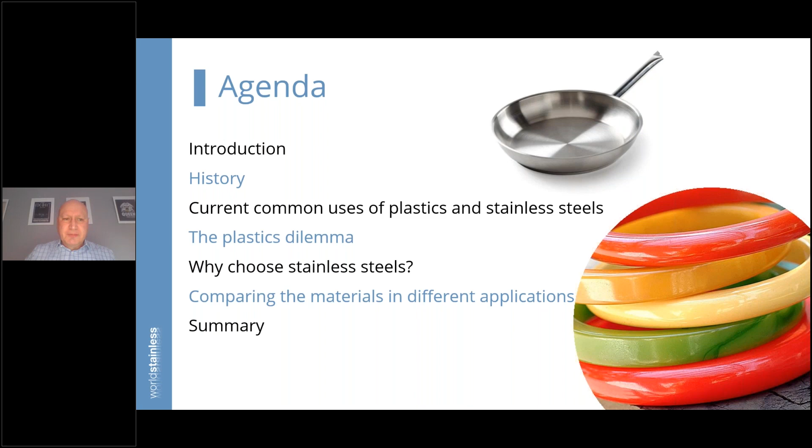So a little bit of an introduction, and I think it's fair to say that both plastics and stainless steels were invented around the same time in the early 1900s. Bakelite, the first fully synthetic plastic, in 1907, and the first commercial stainless steel cast in 1913, so 6 years apart broadly. It should equally be recognized that the notion of synthetic polymers was not brand new at that point. There was something attempted in 1869, however it was not quite 100% synthetic. So I just want to make reference that the development of plastics is quite old in that context.

And it's equally fair to say that both groups of materials have supported some amazing things and have been things of necessity in many cases. Our society has evolved, whether it be computers and cell phones that we all love and hate in equal measure today, to more important things like medical equipment, clothing, and even body armor from a plastics perspective, and stainless. The general healthcare of our society would not have taken some of the leaps forward without the use of stainless in household appliances, surgical instruments, and equipment for safe processing of food and drinks. We rely so heavily on stainless steels in those areas. So a little reflection of some of the really important things in our society.

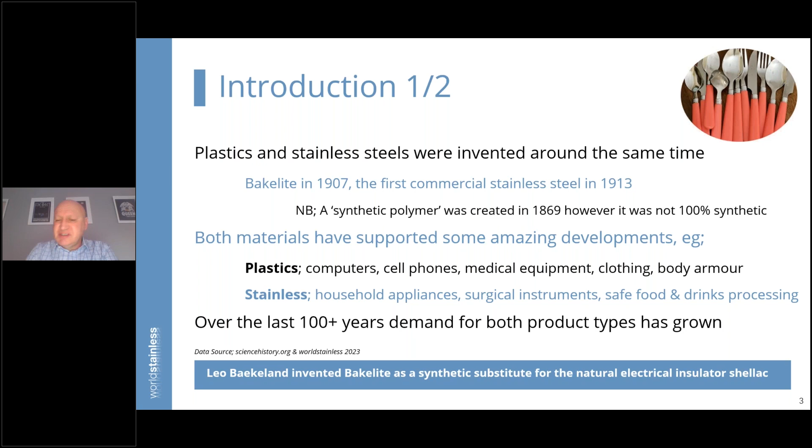And equally, there is no doubt that over the last 100 years or so that these products have been around, the demand has consistently grown. So there's a shared element there too.

But also there's some really interesting differences when you look at the tonnage of material produced. Plastics approach about 400 million tons on an annual basis now, and it's hard to define, but around half of that is reported to be single-use plastics, and that's clearly an area of concern that most people would recognize. By contrast, stainless is much smaller, around 50 million tons or a little over that produced annually. So we're talking, when you consider the relative densities of these products, a huge amount of plastic things and a smaller amount of stainless steel things.

And in many cases, if we think that a lot of plastics are single use, that's a short life compared to stainless steel, because when you correctly specify a stainless steel for an application, it will provide a service life in excess of 100 years. And equally, what's really important and interesting is you'll get that service life with either very low or in some cases, zero maintenance.

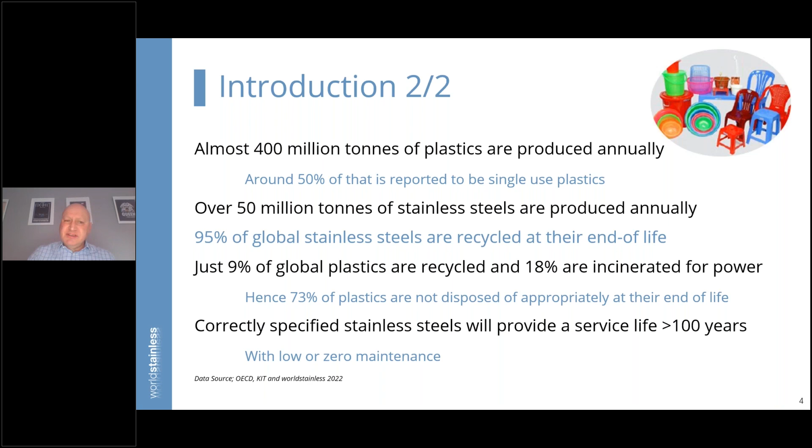So having set the scene, let's start with a little history. I think we have to, depending on where you start in the world, reflect on two important guys, Leo Baekeland and Harry Brearley, who were both recognized as pioneers of their respective industries.

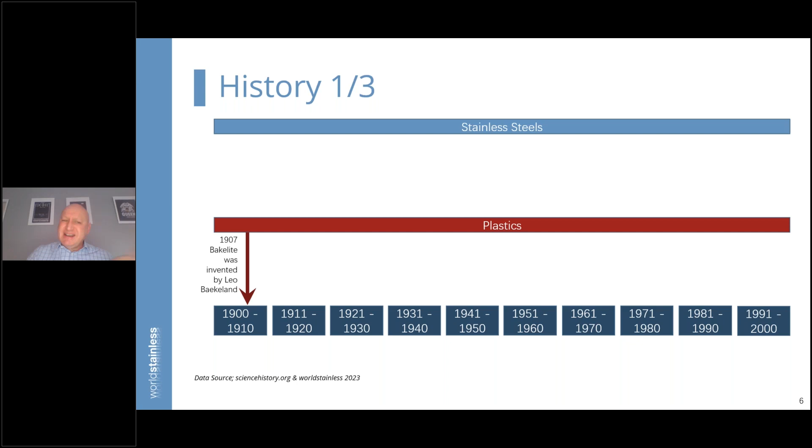If we start with a simple timeline, I'm not going to include everything, just a few interesting highlights. Bakelite was invented in 1907, followed a few years later by Harry Brearley's first commercial cast of stainless steel. It's fair to say other people were developing other stainless steels around that time, 1912, 1913, 1914.

In the 1920s, stainless steel was first used to store nitric acid, which has become a common use of stainless steel over the last 100 years or so. The early 1930s saw the first duplex stainless steel created in Sweden. Duplex stainless steels are high strength, with many useful applications, particularly in building and infrastructure.

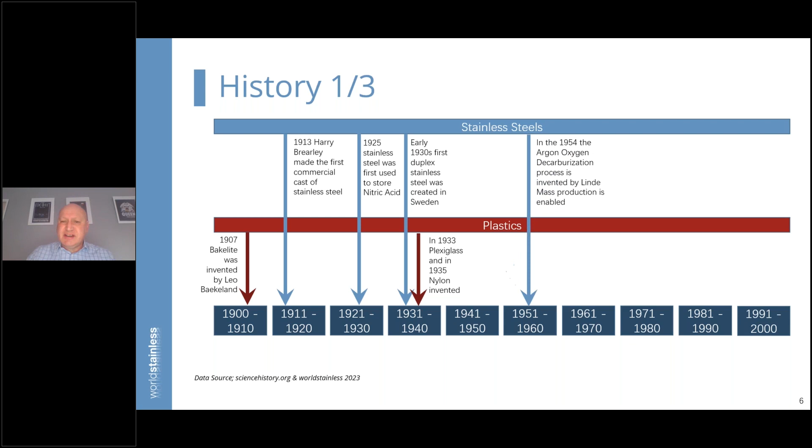In the 30s, we got plexiglass and nylon invented, which we all recognize and know so well in our society. In the 1950s, the notion of argon oxygen decarburization, which I'm not going to describe in this webinar, was invented. That was the enabler for mass production of stainless steel.

Interestingly, it took until the 1950s for stainless to move from what I would describe as a cottage industry to mass production. By the 60s, plastic production at a global level hit 10 million tons.

In the 1970s, we shouldn't forget, certainly for older people like me, that plastic water bottles became quite sexy because they were promoted on catwalks by models. That was very prominent in the rise of the use of bottled water.

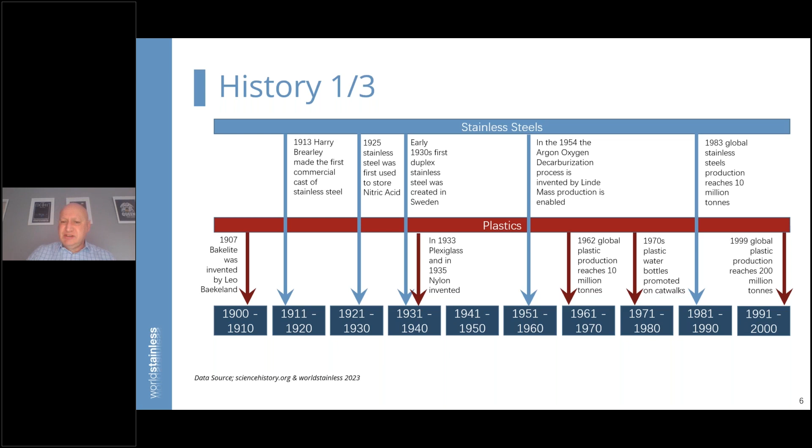By the 1980s, so 21 years later, stainless steels reached global production of 10 million tons. And by 1999, just before the turn of the century, global plastic production reached a staggering 200 million tons - a huge step up from the 1960s.

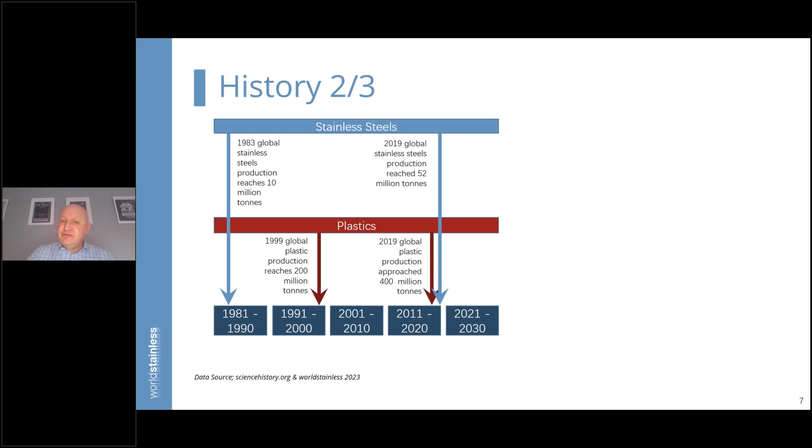Reflecting on the last few years, by 2019 global plastic production approached 400 million tons. So in relatively few years, 20 years, production had almost doubled. In that same time, stainless production reached 52 million tons - some quite staggering differences.

What's interesting to reflect against that growth in production and consumption: 70 or so years ago, the global population was 2.5 billion people, and now we have almost 8 billion people. Over half of those live in urban settings.

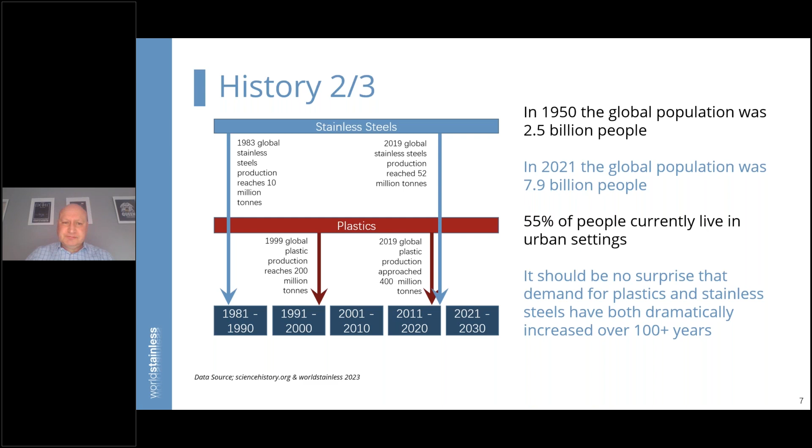When you have the bulk of your people living in urban environments, it shouldn't be a surprise that demand for things like plastics and stainless steels have both increased quite dramatically over the last 70 or even 100-plus years. Here are the charts that demonstrate what I've said, showing the amazing ramp up.

of plastics compared to stainless steels. Both have been growth industries. Plastics has leveled out more in the last few years, but I think we probably understand why some of that has occurred.

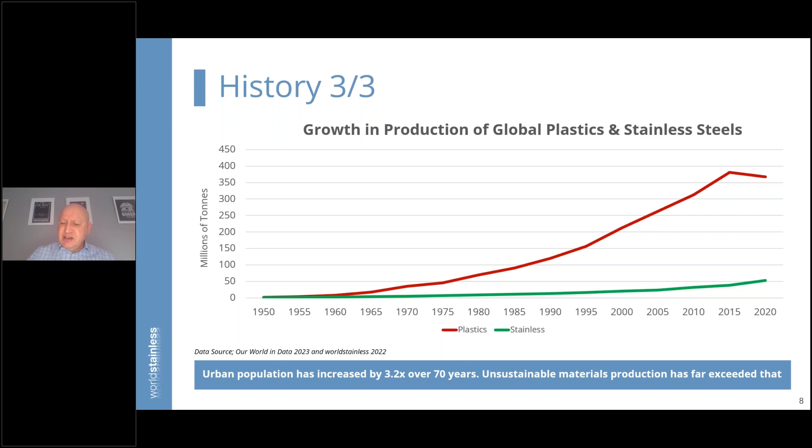But what's interesting, looking over this 70-year time horizon, the urban population has increased by 3.2 times, and yet what I would class as unsustainable materials production has exceeded that. So it's an interesting reflection - what has driven our society, even though the population has grown, to adopt materials that aren't naturally reused and recycled?

So let's now reflect for a moment on a few common uses of plastics and stainless steels. It would be unfair if I didn't include the famous Lego brick in this - I think we've all enjoyed and suffered from treading on Lego bricks in the middle of the night.

But healthcare without plastics, waste collection, pipe work, crates for moving material around, food containers, which I'll touch on later, packaging materials, and even storage vessels - many uses of plastic we see in our everyday life, and probably don't even bat an eyelid, as we walk past these things. These are everyday uses that are commonplace, we're familiar with.

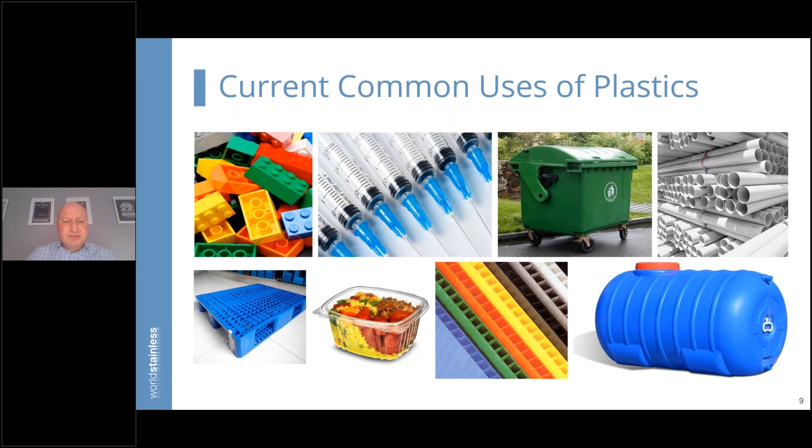If we reflect on stainless, some things here you will recognize and some maybe less common. Kitchenware and appliances is fine, we all recognize that. Process plant as shown in the bottom left-hand corner of this slide. Medical equipment, fairly common. Cutlery we know about, but reinforcing bar for construction is starting to grow in its use. It's still less than 1% of total steel usage in construction, but is growing. We now start to see the introduction of food containers, rail cars, pipework again. And there are some clear overlaps where stainless and plastics can be used for very similar things.

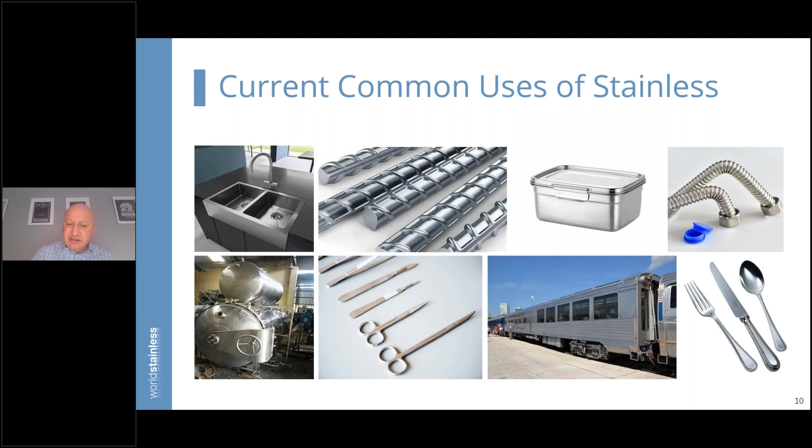But we need to think back a little. There's no doubt that World War II necessitated a great expansion of the plastics industry, because so many things could just not be developed by dragging things out of the earth. So this drove the development of plastics, and it equally didn't constrain human manufacturing. We were very inventive in that period. The ability to make new materials and products was really important for the development of our society. And these products were often inexpensive and considered safe and hygienic. Maybe we're reflecting on those latter two points in more recent times, but back in the late 30s and into the 40s, this was how things were considered.

But we have to recognize that the source of most plastics relies on fossil fuels, particularly the carbon atoms used in building those polymerized chains. Ultimately, that would become an environmental red flag for our society. I think it's probably very fair to say - and I've got a spelling mistake in this line which any of you sharp-eyed people will notice - our planet really cannot sustain the amount of virgin consumption we are and have been used to. So we have to make some changes. I think that's really fair to say.

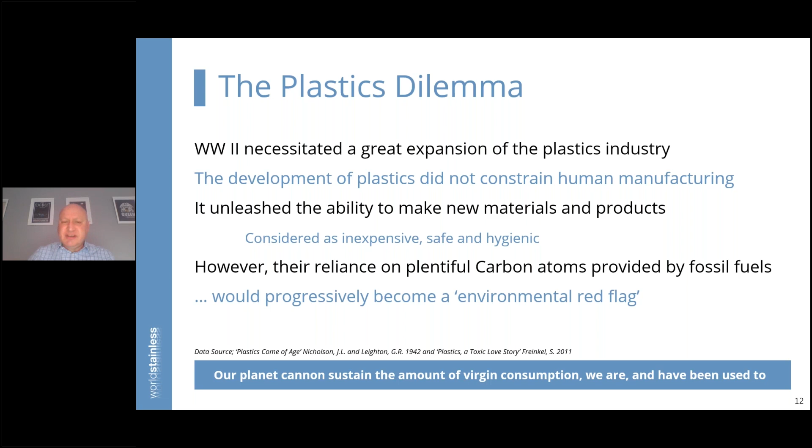Just a little reflection, I couldn't resist this picture - nothing to do with me, even though the surname is the same. But I remember as a young boy growing up in the late 1960s and into the 70s, all the milk and juices came to our homes in reusable glass bottles, and we diligently washed them out and left them out, and they were collected. I don't remember my parents ever asking for that to change - they were very happy with that. What drove that change to plastic containers available through supermarkets?

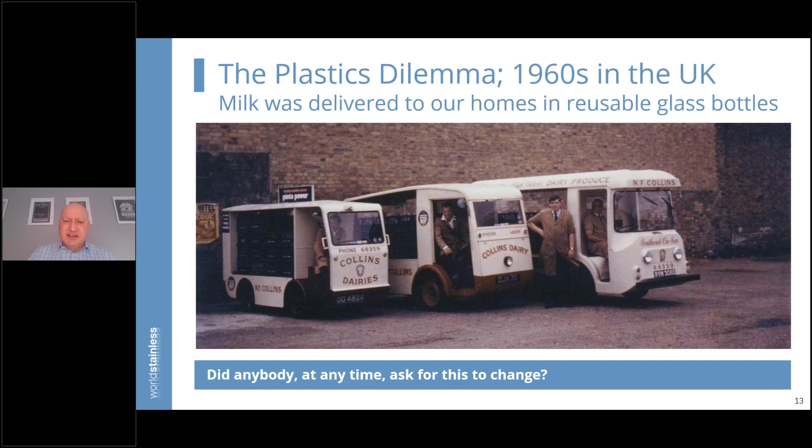I've gone back to glass bottles being delivered by a vehicle similar to this, more advanced. But hey, the notion of electric vehicles existed then - all the deliveries that I remember as a small boy were electric milk carts. It's interesting that times are sort of moving round. But that's just a little reflection on, I think, a society many of us may remember.

Going back to the notion of the plastics dilemma, pretty much all plastics are produced from fossil fuels today. There are bioplastics coming on board, but it's relatively modest. If you try to say, well, how much of these are single use - there's many reports out there, but about half seems to be the common view. An interesting reflection is if you look at street litter, most urban settings would say now 4 out of 5, or 80%, of that street litter is single-use plastics, primarily associated with fast foods.

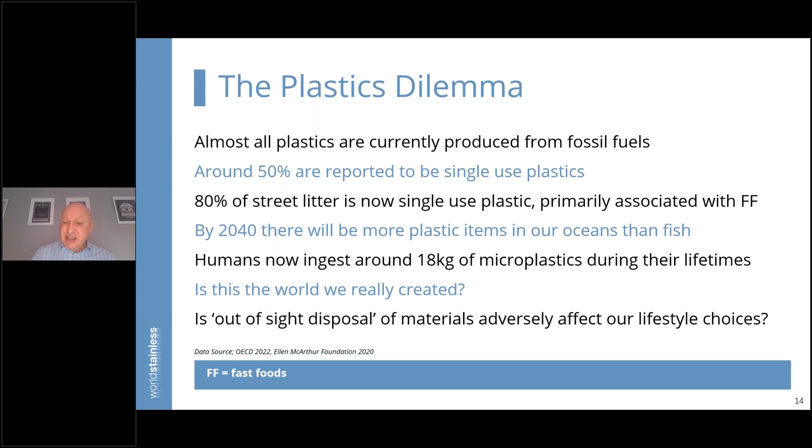I think it's also well recognised that not too far into the future, by 2040, we'll have more plastic items in our oceans compared to fish. That's a worrying statistic for anybody. Equally, humans ingest quite a significant volume of microplastics in their lifetimes. Whilst that's proven, some of the outcomes are not yet, but that's another worrying feature. So is this the world we really wanted to create, where we've got all these sort of other proportions? But that is the fact - what I class as out-of-sight disposal of materials - does that adversely affect our lifestyle choices? Are we conditioned because we don't see what happens at the end of life to certain materials?

And, you know, I think we all try to segregate plastic waste into waste bins sitting at the end of our gardens or the end of our roads. But even if we're doing that and we're very diligent about it, the recycling isn't happening.

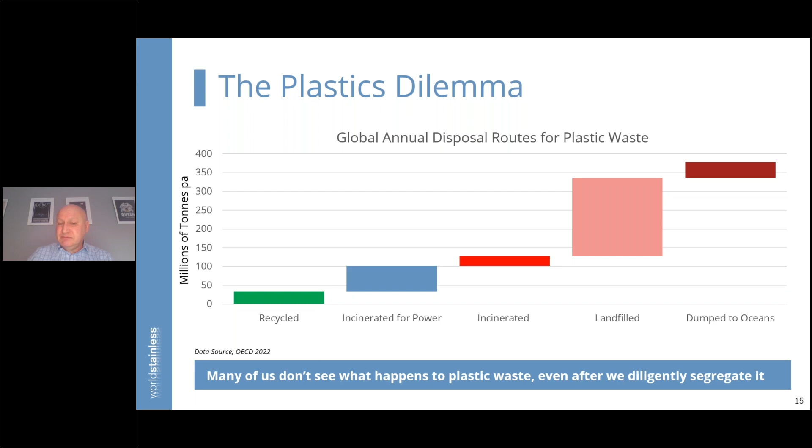So the cost over time, this has been calculated over 100 years of waste plastics, but we know they linger around much, much longer than that. This is just to give an interesting reference, which I'll come on to in a moment, to the cost of disposal of stainless steels.

So even recycling is quite costly, and incineration a little less costly, but obviously gives something back in terms of power. And then the other things, the straight incineration in open land, landfilling and dump to oceans, creates ongoing environmental costs that at the minute we don't necessarily see an end of. So some of these costs will only get worse over time unless we do something very drastic.

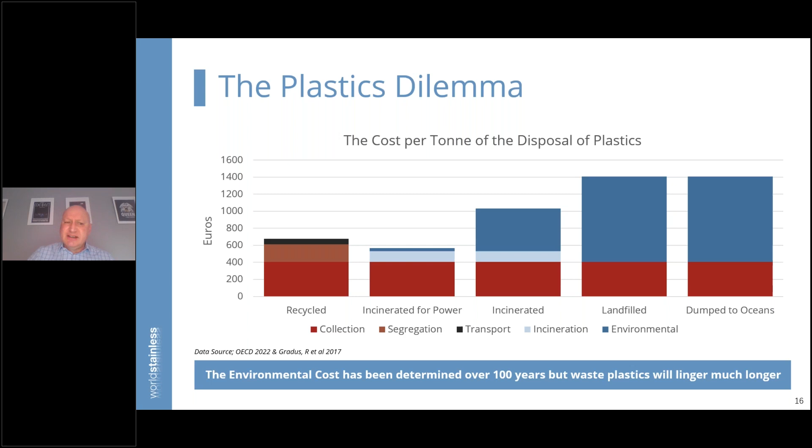Stainless steels are also much more dense than plastics. So things like transport costs are much lower because you can move a lot of metal for much less money compared to something that's very light and difficult to compact in the same way. So there's some obvious things, but again, the environmental element is still highly dominant in this.

And this is the frightening feature, that this element of the costs for things that are not recycled are almost hidden, but are there.

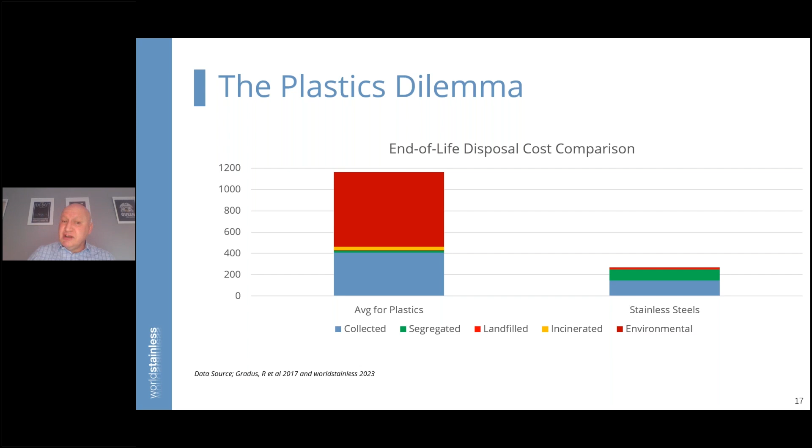So, as I've said, much of the cost of plastics in our society is hidden. We see them as cheap, lightweight, and useful, and there's no doubting they are. We can't argue with that. But I would argue they come with some serious warnings.

And that's not to say the plastics industry haven't, I think since the 1950s, offered recycling solutions for their materials. So I don't think we should be criticizing the plastics industry necessarily here, because they know as an industry how to recycle plastics, but very little, as we've seen, is recycled.

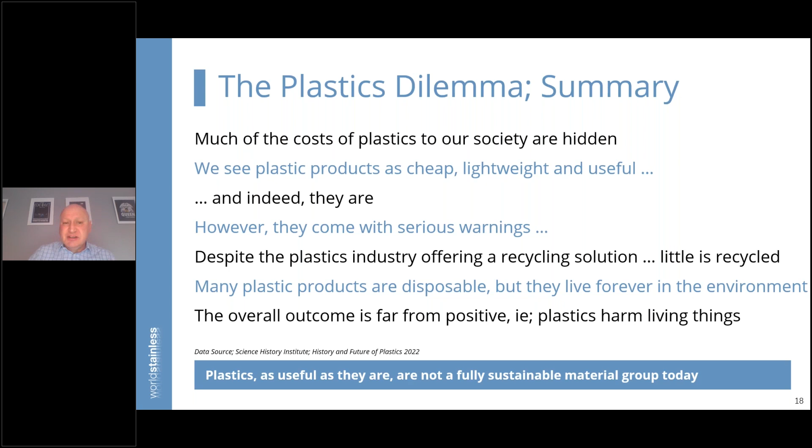We create in plastic products disposable products that ultimately live forever in our environment. So the overall outcome is far from positive because of the way plastics are being used. Not that plastics used appropriately are necessarily bad, but in the way they are today, they are not a fully sustainable material compared to other things that are well recycled.

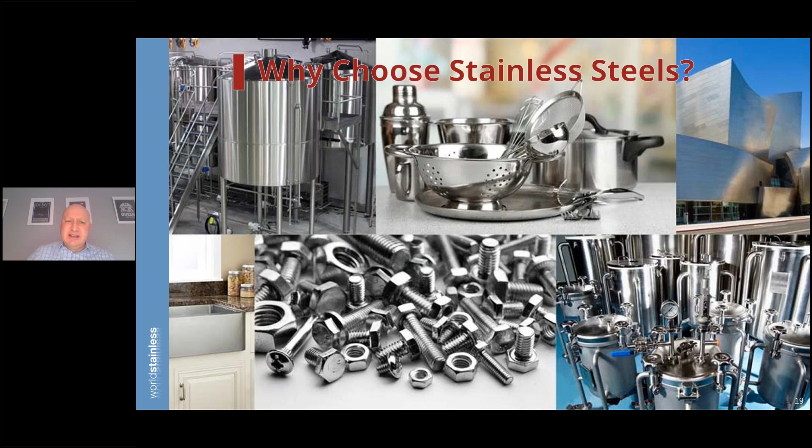So, having been a little provocative in that last section, why the hell would you choose stainless steels? There's some interesting reflections on stainless steel items again here. But let's have a quick reflection, because people will say, well, hey, why the hell should I be choosing stainless steels when, firstly, hey, they're expensive compared to other materials.

They're heavy when made as a packaging or even a lifestyle type product. It can be an illogical choice for fast food applications because you can't stick a stainless steel container in a microwave oven, and indeed you can't. But I think we have to overlook some of those things.

And stainless steel, hey, the steel industry is a dirty industry. Well, that's a perception. Steel generally has quite a low carbon footprint, and when you start recycling things, the carbon footprint drops even further. So we have to keep things in context.

But of course, people remember, and often movies and things show industry as a dirty looking set of factories, and the smokestacks kicking out all sorts of awful things is what people have in their minds. But the industry has changed.

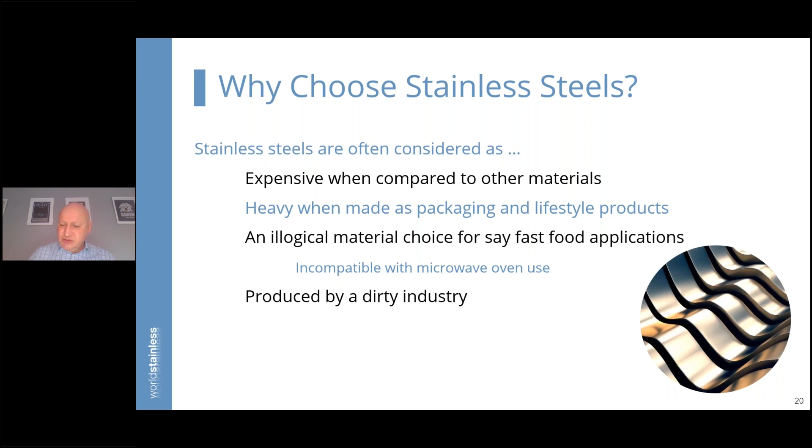Because we are an association, we can't talk absolute costs in this context, we've got to talk relative costs. I'm using three types of materials: single-use plastic, reusable plastic, and stainless. If we attach a relative product cost of 1 to the single-use plastic, a reusable plastic will be around 4 times more expensive, and stainless 28 times more expensive. Suddenly you're saying, wow, that's a huge difference, and indeed it is.

But if you then add to that the relative environmental cost, you see quite a big difference. Single-use plastics carry a significant environmental cost, and these costs are often hidden, and we end up paying them indirectly. These are things like tourist taxes or local taxes and charges to gather, process and even ship out plastics. There are costs already applied to products, lots of hidden things we don't see but end up paying indirectly.

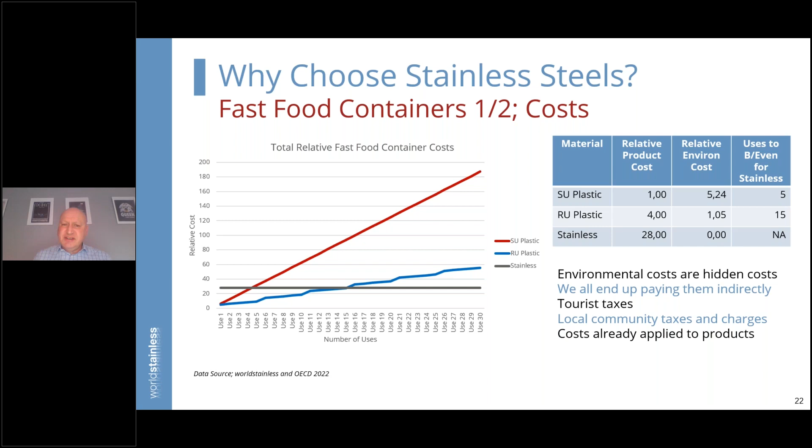So it's an interesting reflection, but the story doesn't end there. It's equally interesting to look at emissions. If we look at 1 gram of polypropylene, which is typically used for many of these plastic containers, producing that emits about 1.7 grams of CO2. 1 gram of stainless steel is a little higher, 2.2 grams. So you say, hey, these numbers are not so far apart. However...

A single-use polypropylene container only weighs just over 9 grams, and a reusable stainless food container weighs a whopping 475 grams. So if you convert the emissions into per container, a single-use plastic container is almost 16 grams of CO2, a stainless container is 1,045 grams. So we see a significant difference here, and people will say, hey, that's not so good.

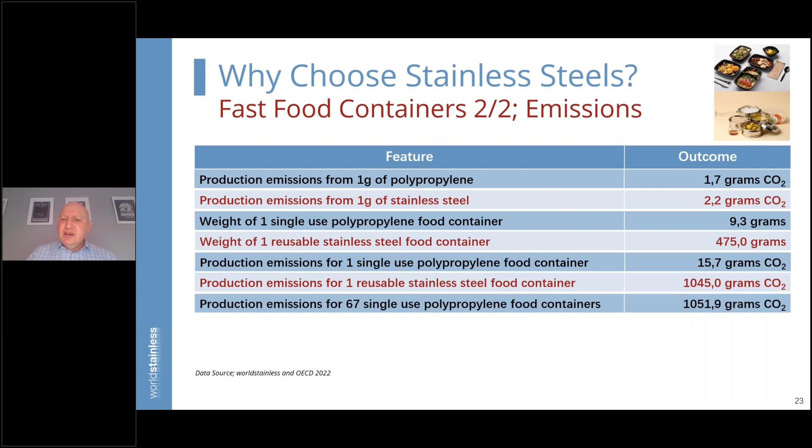However, if you think about the number of uses of a plastic container, when you get to 67 plastic containers, the total emissions exceed the reusable stainless steel container. So 67 uses is an interesting number, because assessing the use of fast food containers, the global average number of fast food containers used per person per year is 135, and 67 is almost half of that in simple terms.

So that's an interesting reflection: if you choose the stainless container and you are an average person, and I know we're not all average, after 6 months the stainless container has a better environmental footprint.

The known life of 1 reusable stainless steel food container currently stands at 750 reuses, and we're still counting. That's proven, that's work undertaken over the last few years, but it's still going and we will keep developing this. I don't see any reason why the stainless container can't exceed 1,000 uses with no problems at all. So the emissions reflection is a slightly different perspective, but this notion of life cycle, or usage in this case, thinking, I think is really important.

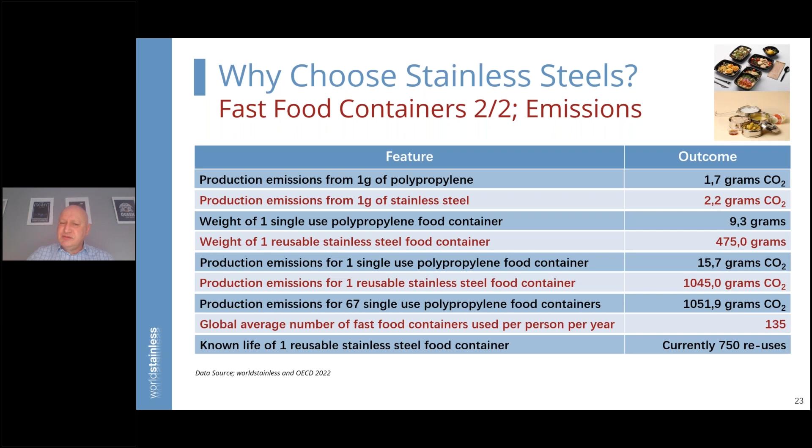So why? Because people will say, well, hey, the life cycle cost or the usage cycle cost is much lower compared to alternative materials, and we have to think in this way. The environmental impact is highly positive because you're not remaking things. They offer the best recycling rate of all man-made materials. Stainless steels and general steels are up there; aluminium is probably second, but some 20 percentage points below the steel category.

Hygienic and safe products: stainless steels meet all global food and drink contact material standards. In fact, they are the only material that satisfies all the standards all of the time. As I've said, they have a very long service life and a high reuse rate - we know more than 750 uses is easy. These things are really easy to clean.

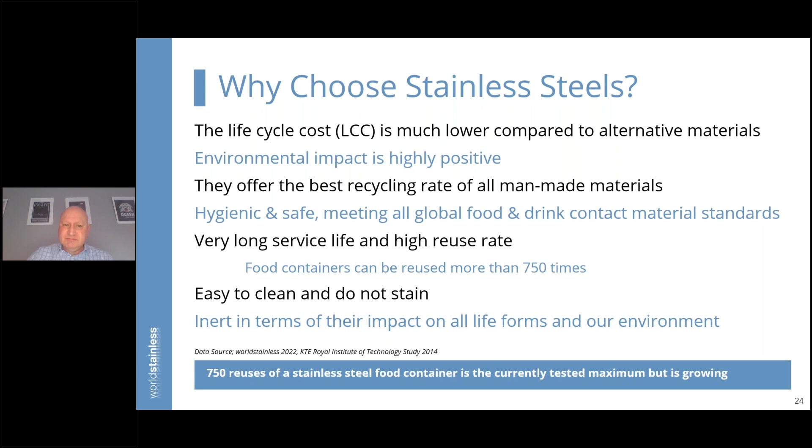So let's move on now and compare materials in different applications.

First, just a quick reflection on fast food containers, but with a new twist. I've already explained the benefit of choosing stainless for fast food containers, but legislation is pushing us to eliminate single-use plastics. In Canada, their legislation hits on the 28th of March, not long away. An example from Montreal is that the prohibition kicking in formally on the 28th of March covers many single-use plastics for food and drinks use, both packaging and distribution directly to customers.

But at this point I'm going to ask Joe to kick in and show another example that's also from Canada, because their legislation is kicking in and there are many of these companies springing up. So Joe, would you like to take control at this point?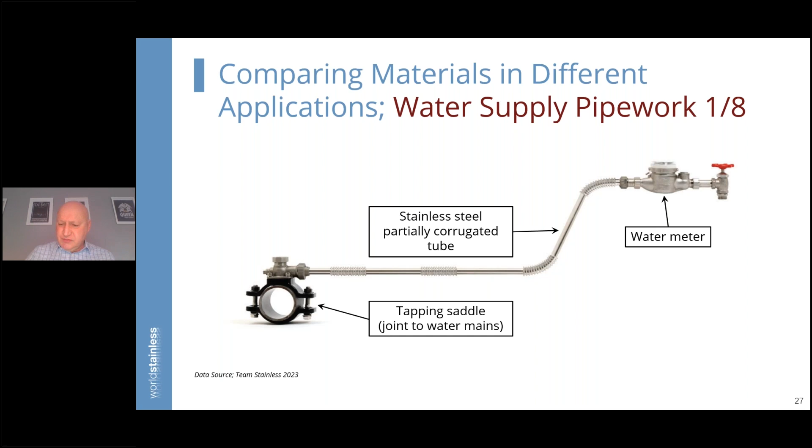Okay, moving forward, the second example is water supply pipework. Many people will be familiar, as they've travelled around cities and suburban areas, with seeing workmen digging up water pipes and fixing or reinstalling things. It's common to see this in our world, but does it have to be? Here's an example of a stainless steel water pipe that runs on the left-hand side from the water mains pipe, generally made from cast iron, to the water meter at the property. The interesting thing is it's a partially corrugated stainless steel tube which can be bent by hand, so you don't have any joints, which I'll come back to in a moment.

Now let's start with the headline numbers. People may not realise that on average across the world, 30% of treated water never reaches the point of consumption—homes, offices and other businesses. So something is being processed and never gets to the point of consumption. Most of that water is lost due to leakages in the supply network, and the bulk of those leakages occur in the last meters of the supply pipe, known as the service lines between the water mains and the properties, as shown in that previous image.

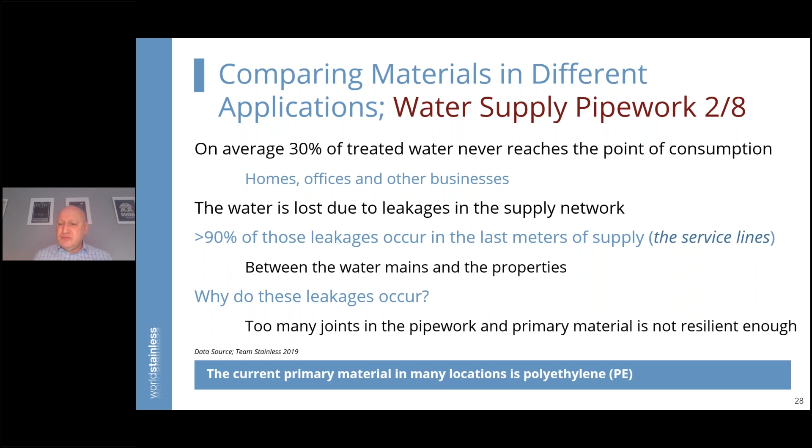And why do these leakages occur? Well, essentially, if you're using plastic pipework, you've got too many joints, you can't flex it in the same way, and that primary material, the plastic, is not resilient enough for the purpose for which it is intended.

Now here's just a reflection of treated water losses in a selection of major cities. I could have put any range of cities here, it would have shown the same profile. What's interesting is you've got a few very well-performing cities on the left, and progressively poorer performance as you move to the right. The dark green line is the world-class water loss proportion that's achieved using stainless steel pipework.

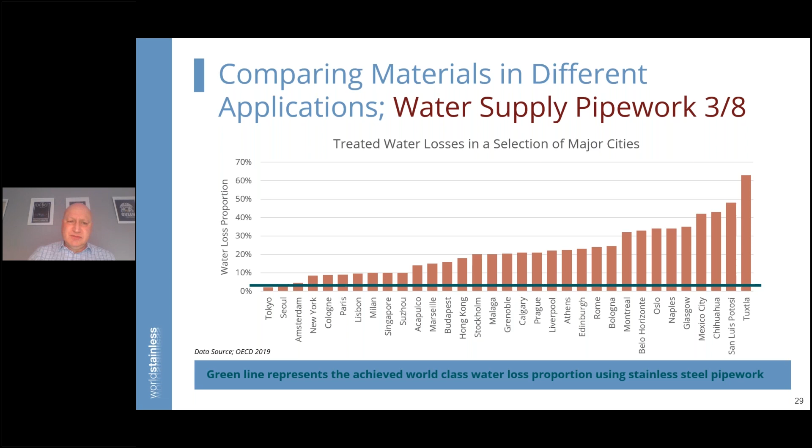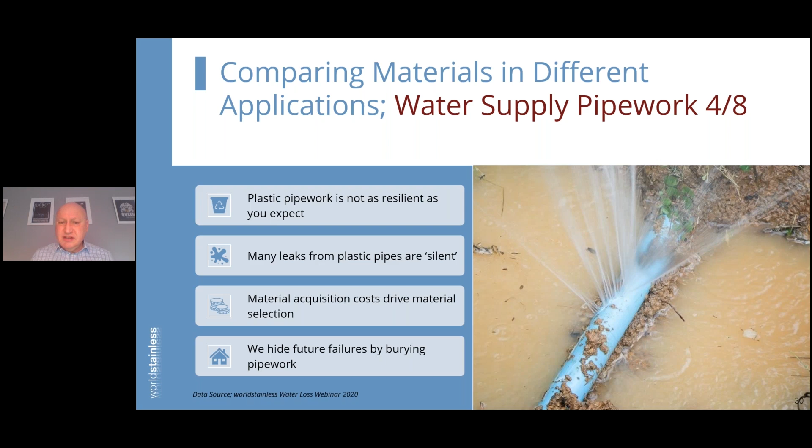So you would say, why are people not doing this? That's an interesting question. But let's start with plastic pipework—it's not as resilient as you'd expect. One of the problems is that many of the leaks, particularly when small, are what I'd term silent; they're difficult to hear, and they're underground, of course. Within the industry, material acquisition costs drive material selection, so upfront costs are driving choice of materials rather than whole-of-life costs. And equally, we hide the failures by burying pipework underground. When you think about it in those terms, it's quite an interesting reflection—if you've got something that is not resilient and you hide it, you're just hiding your problems.

So what's the solution? If leakages from plastic pipeworks and their fittings, the joints, are the problem, what's the solution? I would argue it's flexible stainless steel pipes and fittings. Take the fittings away or minimize them and have a flexible system. As I've said, you can bend these things. You don't have to have fittings to navigate corners. And if you're going to stick something in the ground that you can't see, you really need something that's going to work day after day, year after year. You need this notion of fit and forget rather than install and repair.

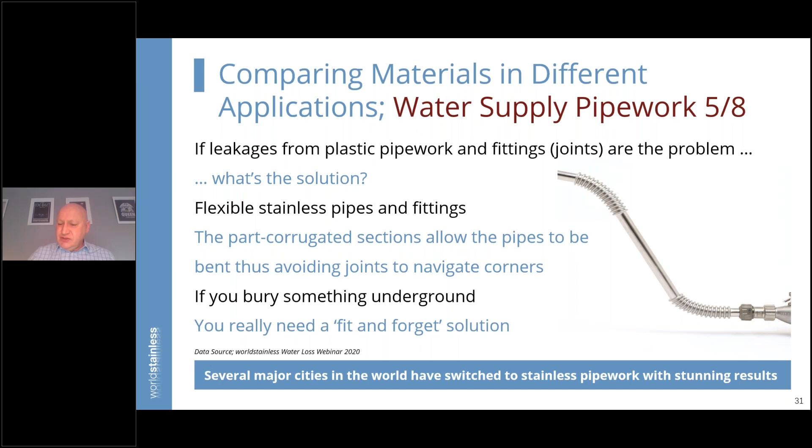Several major cities in the world have already switched to stainless, and the results are stunning. I'm going to use an example from the city of Seoul in South Korea, a timeline from the early 90s to 2014. Three lines on this chart: the green line shows the proportion of stainless pipework in their system, which started low in the early 90s and progressed up to about 90%, which seems to be an interesting level. The number of repairs started around 45,000 per year in the early 90s, dropping to 10,000 by 2014. The leakage proportion was almost 30% at the start, dropping to 2.5% at the end.

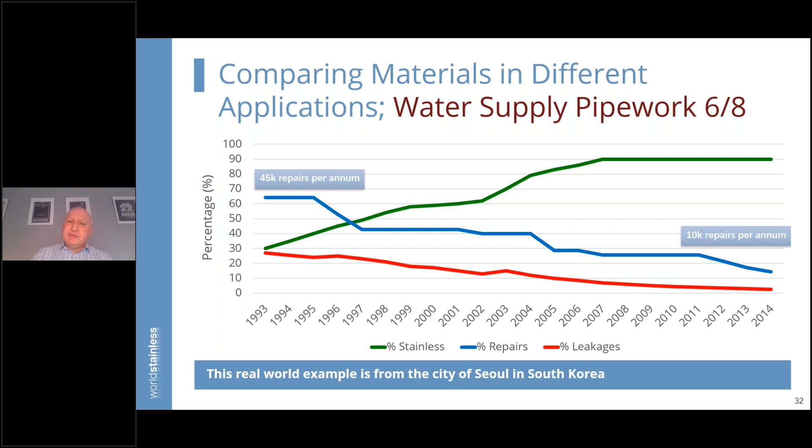That looks impressive, but some people will say, show me the money - what's it all about? So here's the summary: leakages approaching 30%, down to 2.5%. Stainless proportion of service pipes progressively increasing, repairs falling. Look at that in repairs per day - you've gone from 125 down to 25 a day. Massive reduction in water treatment plants needed, massive reduction in CO2 emissions, and the savings are staggering. Over that 22-year period, approaching $4 billion of financial savings, that's 174 million US dollars per year. This is one of several examples around the world, and the numbers are all similar and staggering.

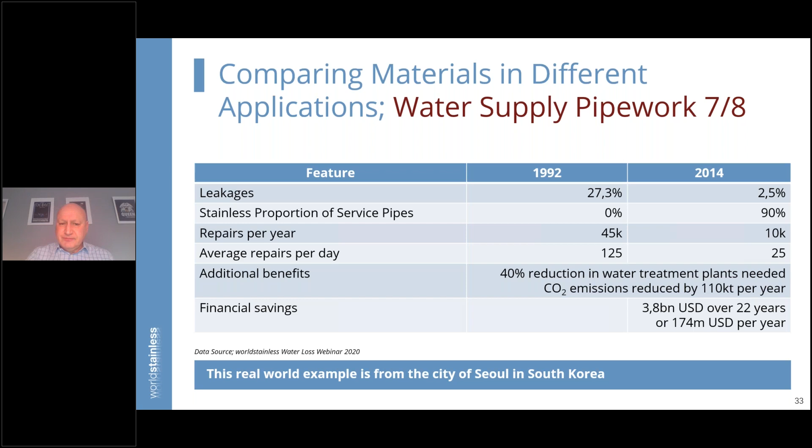There is no doubt that this solution works and works well. You take away much of your headaches and problems, and you're not digging up roads and disrupting traffic. Let's reflect on another example, the city of Taipei in Taiwan, because they've gone through the same process - similar amount of leakages, not quite as high. Back in 2002, 26%. They had another problem: year on year, because of climate change, the rainfall was reducing and their water reservoirs were being emptied. They had no water, and the water company had to shut off water supply to the city. This is a very extreme example of what was happening in Taipei.

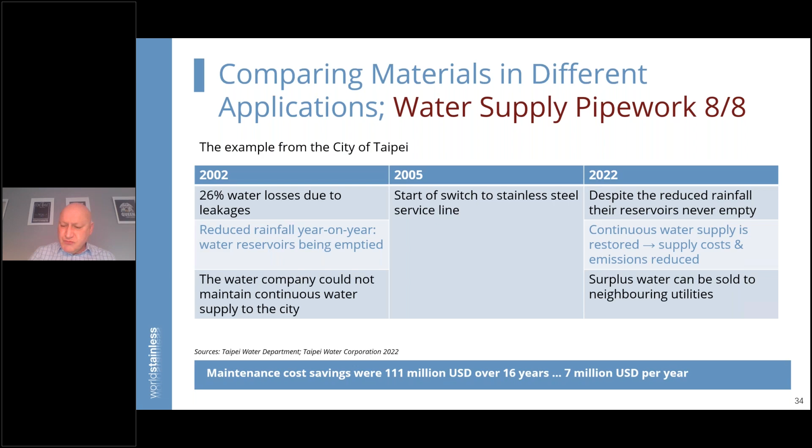So they started to switch to the stainless steel service line, and once they got to a critical proportion, the reduced rainfall, which continued, meant the reservoirs were never empty because they weren't having leakages. The continuous water supply was restored, the supply costs and emissions were reduced, and they even ended up with surplus water that could be sold to neighbouring utilities. The maintenance cost savings were $111 million over 16 years, or $7 million per year. Of course, Taipei is a much smaller city compared to Seoul, but it's a really interesting reflection of the magnitude of benefits you get from rethinking your material selection.

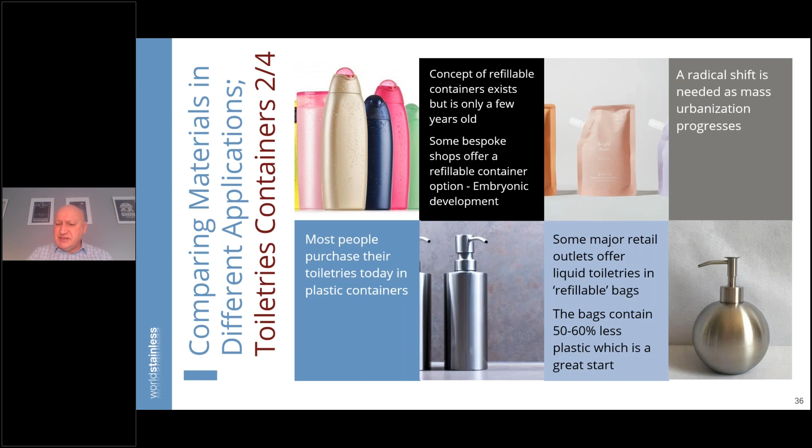Now I'd like to move on to another example, toiletries containers, and we're getting to the end of the presentation. Most people buy toiletries in plastic containers. We know about the refillable concept - it's been around for some time, but it's still embryonic. You can find these refillable liquid toiletries bags in some major retail outlets, and they contain less plastic, which is a great start, but it's not enough, I would argue.

Just something to know. And simple things, too - if you consider things like the drop resistance of the containers, plastics often will not survive regular drops. So if you've got people who, for whatever reason, are prone to dropping things, and when you're in a shower, things are slippy, the stainless container will survive those drops as well. So you get added benefits from changing your material, not just the benefits of costs and emissions.

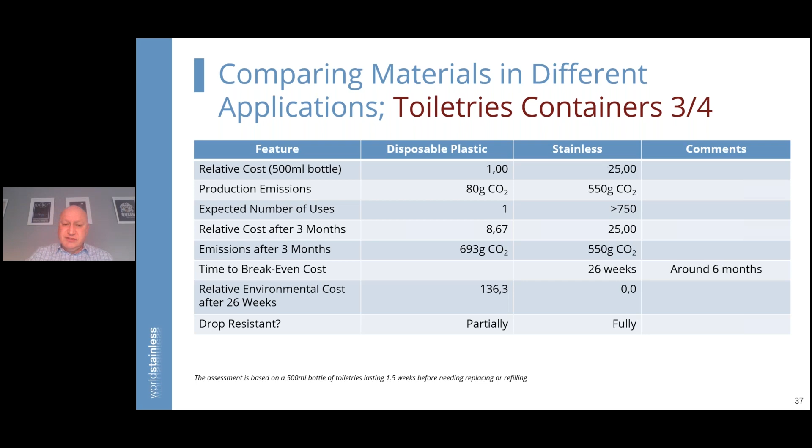There is no doubt that the convenience of plastic toiletries containers has influenced our behaviour, and the fact that you can pick these things up with lots of other things you buy has made the concept easier. But I would argue we have prioritised convenience over sustainability, and we have to rethink that approach. Is it really any harder to choose refillable, long-lasting containers?

It's just a mindset switch. Once you start doing it, you keep doing it. And the costs and emissions evidence should encourage us to make that switch. We just have to prioritize what we do for our planet over other things. It's quite simple.

You have to think, we're leaving a legacy here for our children. Will they really thank us if we don't do the right thing? We're the generation that can make a change and influence things.

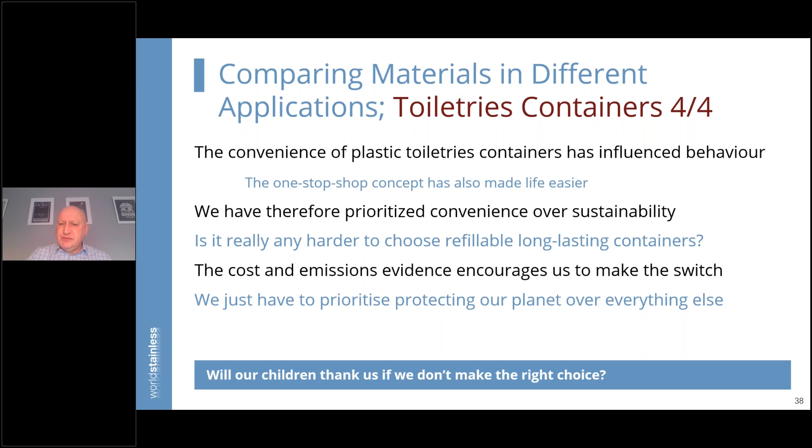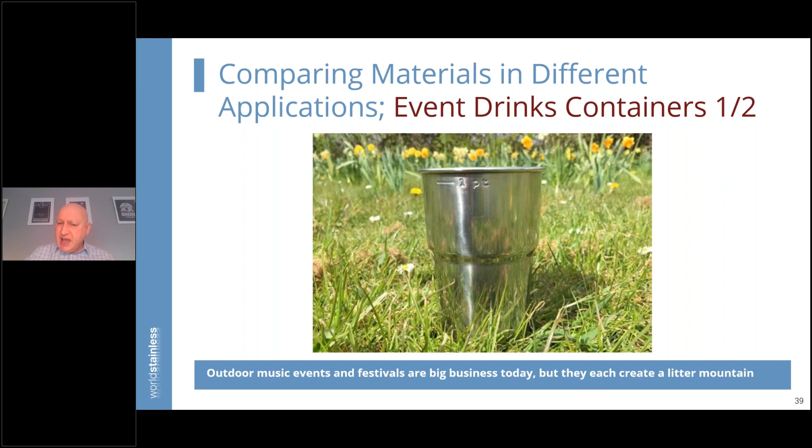Let's do it. So lastly, I'd like to talk briefly about event drinks containers. This is something I was personally involved in, and it applies to outdoor music events and festivals. They're big business, but every one of them creates a huge litter mountain. I'm going to use Glastonbury in the UK as the example here.

The organisers of the Glastonbury Festival had a dilemma. This goes back to 2016. It took 6 weeks to clear up the litter, with a team of people dedicated to this for 6 weeks after a 2 to 3 day event. Much of that litter was single-use plastics, essentially drinks containers. It's a summer festival, it's hot, so you get the picture.

So their solution was to switch to stainless steel reusable containers. What they did, which is really interesting, was engrave the containers with the event details, creating a souvenir item. They charged €6 for the containers and sold 300,000 in about 48 hours. That reduced their litter massively.

So this was the start of a progression to use materials in an interesting way, actually selling these things along the way, because they were seen as a souvenir. So another dimension, another twist. At the bottom, you can look at this in your own time - there's a link to the Glastonbury video that was compiled to promote this concept.

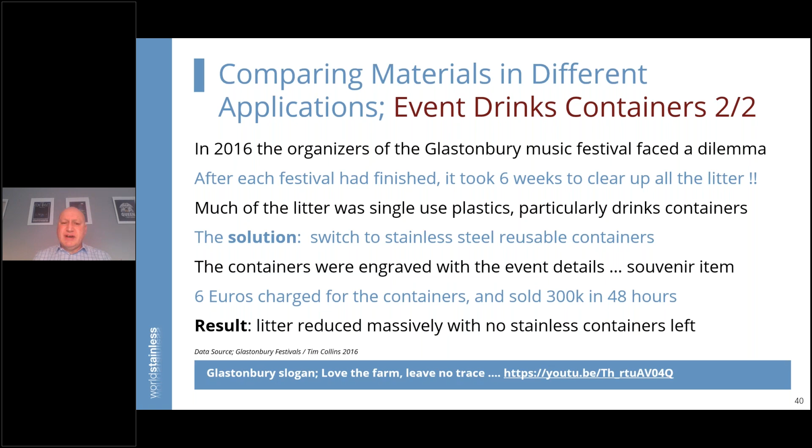So I'd like to wrap up now. Plastics and stainless steels, no doubt, have enhanced our society and our lives. But whilst almost all stainless steels are fully recycled, plastics sadly just aren't. I've touched on how the system isn't effective for recycling, even though we think we're doing great things within our house environments, within our work environments. Our urban settings have become awash with much plastic litter.

It's quite sad. I would argue, and I'm not blaming McDonald's as an organisation, but the notion of the McDonaldisation of our society has become the norm, and we need to break out of it. We need to reverse the situation, because we have to think about our children and our children's children. Whilst there is some legislation now that's helpful and appropriate and starting to kick in, we need to demand change and not be just passive elements in this bigger system.

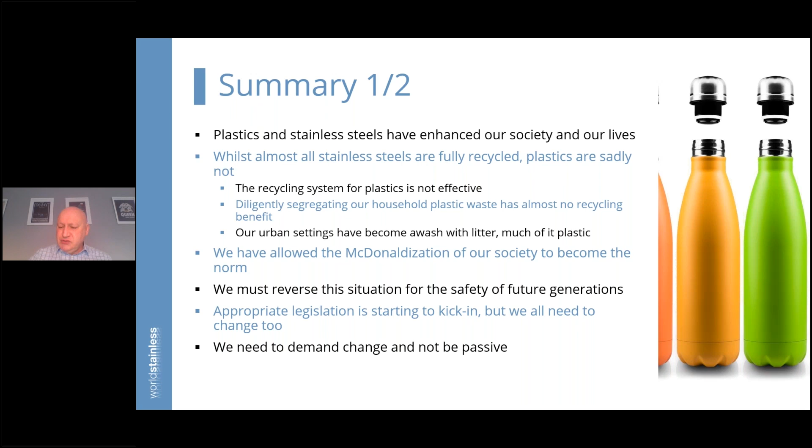So, can stainless steels compete with plastics? I think they can, not necessarily in all applications, but in many applications. If you think about appropriate applications - single-use plastics, creating safe drinking water, etc. - that's where stainless steels have the real role. Plastics still have a role, but we've got way too much of the wrong types of plastics in our society.

And then we can benefit from lower emissions, lower costs. We have this increased impact that's positive on human and animal health. We should think about being reusable, not replaceable. There's no doubt plastics waste as a problem is a dreadful societal outcome and feature, and we're all responsible for that to some degree. Stainless steels are a truly sustainable alternative.

We've got to get out of our heads this notion of being a throwaway society. Did we ask for this? Did we just adopt it? I think our parents would be appalled by the world we've created. They were very frugal, they reused things, they resold things, and we seem to have moved away from those lessons.

So at this point, I'd like to say what we should do is think sustainably, think for a safe future, think stainless. And at that point, I'd like to thank everybody for their attention and say, hey, any questions?